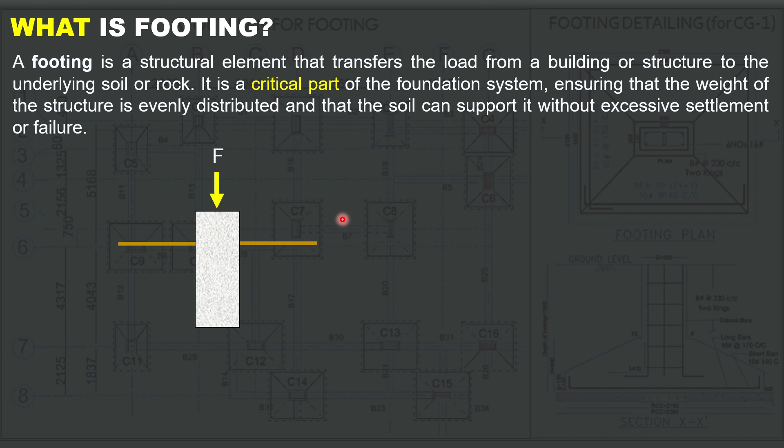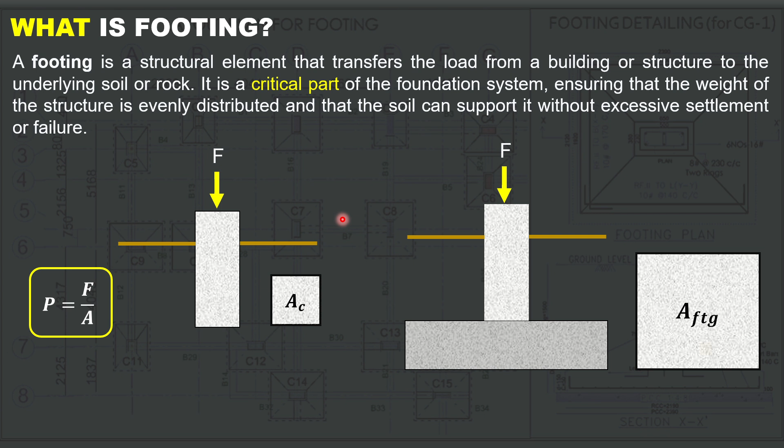Now, we have here two figures. One is without foundation and the other one is with the foundation. Now, notice parehas silang merong load na F, for example. Dito sa figure left, meron tayo ditong area na yung area lang din ng column mismo. Tawagin natin siya as AC. Then the other one is meron siyang AFTG or area of the footing. Now, take note of the formula. Recall natin that pressure is simply equal to the force over area.

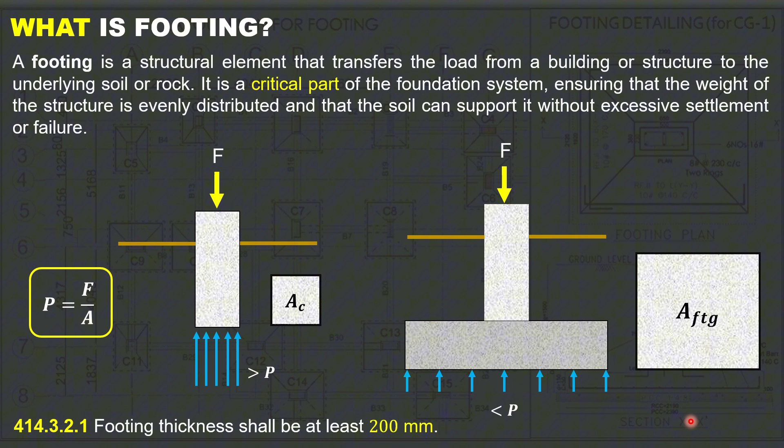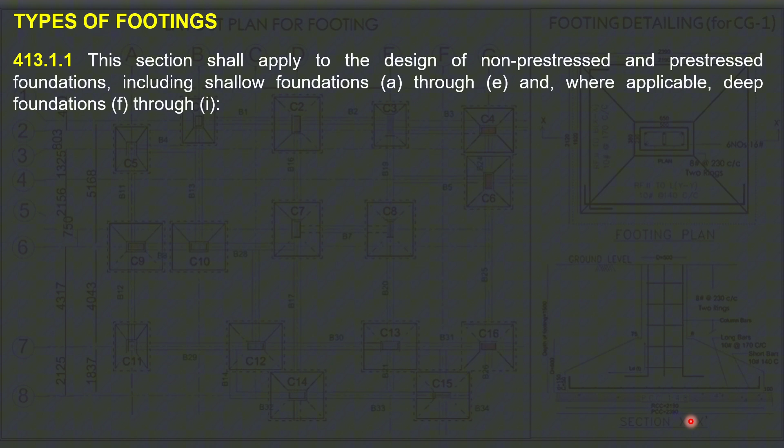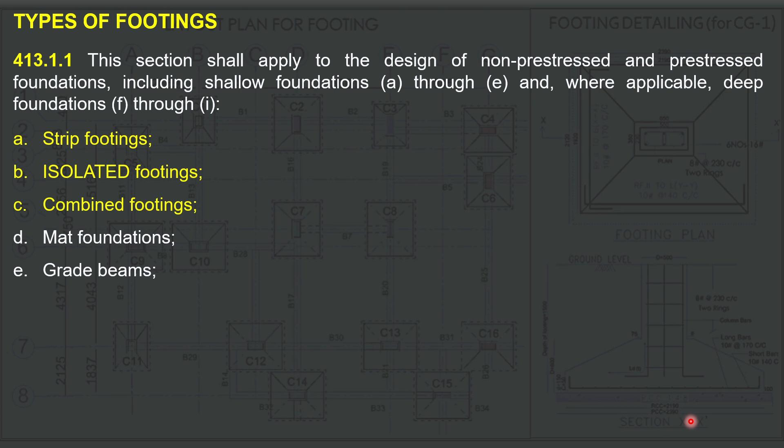Now we have here types of footings. Alright, so according sa NSCP rin natin 413.1.1, the section shall apply to the design of non-prestressed and prestressed foundations, including shallow foundations, which is from A to E, and where applicable, deep foundations from F to I. So yung A to E, it is classified as a shallow foundation, and then yung F to I naman natin is classified as deep foundations.

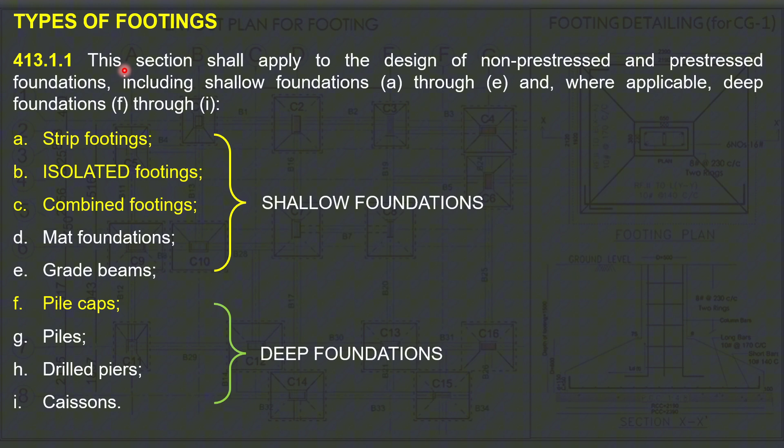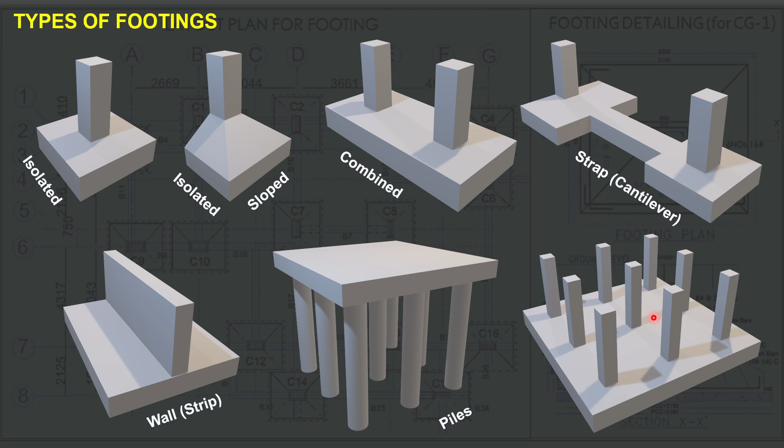We have here the strip or the wall footing. We also have here piles and the mat footing as well. Okay? Alright, so design considerations dapat natin na gawin dito sa Pilipinas, no? So lagay natin dito Philippine standard.

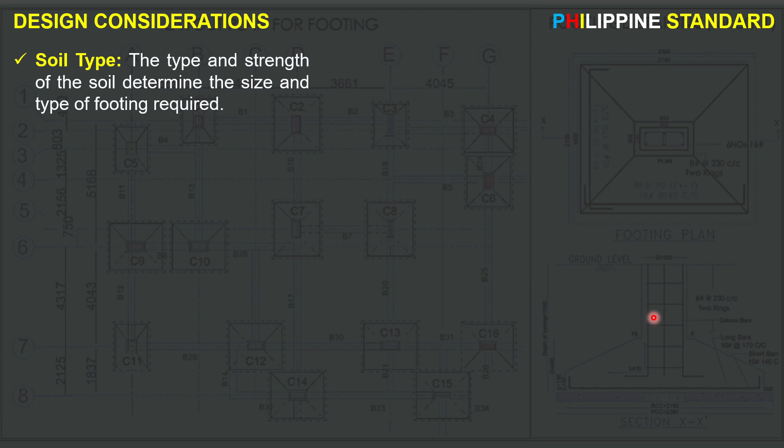So number one consideration when designing foundation, the soil type. The type and strength of the soil determine the size and the type of the footing required. Okay? So kung ano daw yung klase ng lupa natin, magbe-base doon yung magiging size and kung anong klase ng pundasyon yung dapat nating gamitin.

So we have here a snippet from NSCP 2015. Okay, first printing by the way, no? Hindi ko alam kung ito pa rin yung ginamit doon sa ating second printing which was released November 2019. Okay, hindi natin alam, no? O di ko sure kung same section ba sila.

Pero according to NSCP, for structures 2-story or higher, an exhaustive geotechnical study shall be performed to evaluate the in situ parameters for foundation design and analysis.

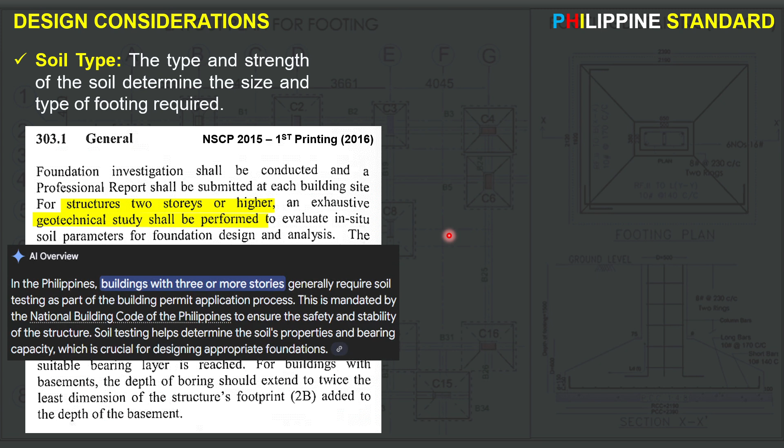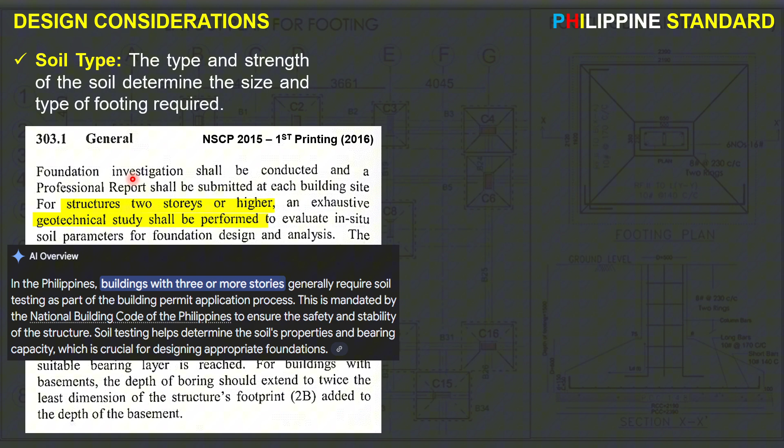Okay, but according to Google, and this is talagang nangyayari dito sa Pilipinas, in the Philippines, buildings with 3 stories or more generally require soil testing. Okay, so sa mga munisipyo natin or sa city engineering offices natin, 3-story talaga yung nire-require ng soil testing and not 2-story. So hindi ko sure if updated na yung ating NSCP 2019. Okay, so please do check na lang po.

And we also have here sa table natin 303-1 the minimum required number of boreholes per structure. If ever na magkaroon nga ng soil testing yung ating building, ito yung required na bilang ng testing or hukay na gagamitin natin sa ating building.

Okay, so for building footprint with area less than or equal to 50 square meters, kailangan lang natin ng 1 borehole. Then for areas 50 square meters to less than or equal to 500 square meters, we have 2 boreholes. And then for areas greater than 500 square meters, the number of required boreholes shall be equal to 2 plus the area divided by 1,000, and always round up to the nearest integer.

Okay, so ang ibig sabihin nitong mga area na to is footprint area of the structure, meaning yung building, not the lot area. Okay, so yung building area yung pinag-uusapan natin dito. Now sabi dito kung 50 square meter or less, required na 1. Sa NSCP natin, 1 talaga yan, no? Pero I'm not sure if most ng mga nagko-conduct ng geotechnical testing, 2 na yung minimum nila. I'm not really sure pero I think 2 yung minimum ng mga geotechnical engineers natin out there.

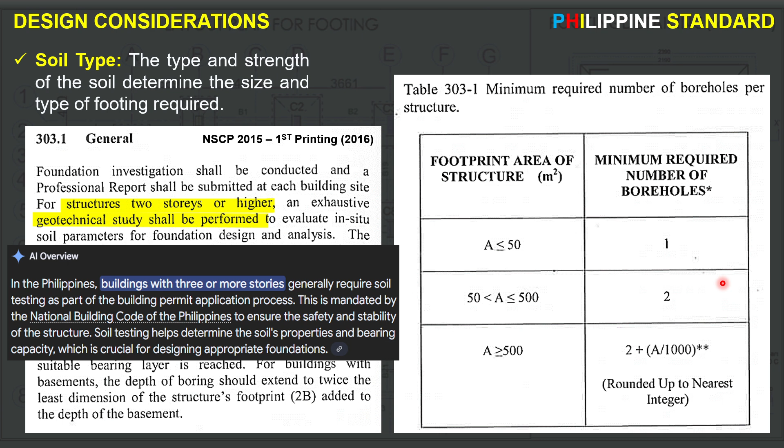So ito yung formulas natin, nasa table 303-1. Alright, and then also we have here a snippet from section 208.4.3, Site Geology and Soil Characteristics. So sabi naman dito, for example, 2-story lang yung building natin na hindi naman required ng soil testing, pero kailangan nating mag-conduct ng structural analysis pa rin. Now, according sa NSCP natin, tinulungan na tayo actually, we have here 208-2, the soil profile type. So, you notice this one sa ating STAAD, no? Ginagamit po natin ito sa STAAD natin if you are familiar with this one.

Meron tayo dito ng soil profile type SA which is classified as hard rock, SB as rock, SC as very dense, SD as stiff soil, SE soft soil, and then SF requires site-specific evaluation, or sobrang hina na ng SF dito. Okay, so according sa code natin, when the soil properties are not known in sufficient detail to determine the soil profile type, type SD shall be used.

If you are familiar sa STAAD natin, kung wala ngang soil testing na ginamit dahil 2-story lang naman yung building natin, okay lang naman daw according sa building offices natin, always assume yung ating lupa to be SD. Okay?

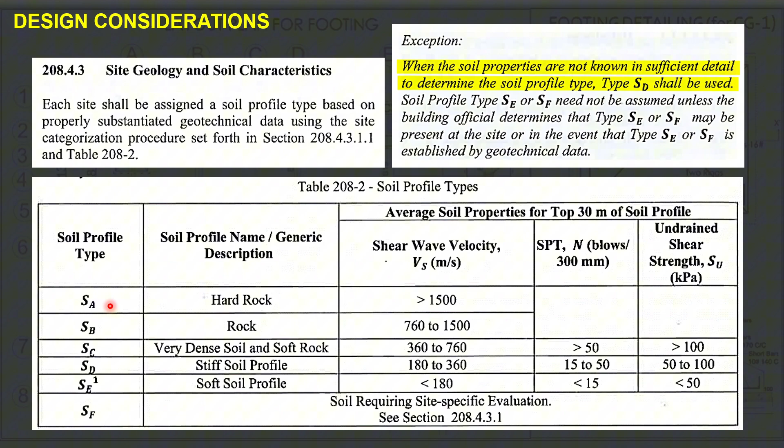Okay, next consideration natin dito sa ating design of foundation is the load. So the weight of the structure including the dead loads and the live loads, yun yung kailangan natin sa pagde-design ng ating foundation. Now, meron tayong dalawang klase ng load. We have the service loads and we have the ultimate loads.

Now, we only use the service loads. Ito yung combination na dead plus live lang, walang factor. Ibig sabihin nun, gagamitin naman natin yung mga service load to determine the size of the foundation. And kapag ka-factored naman yung mga loads natin, that is to determine the number of rebars naman po, yung mga reinforcement na kakailanganin natin dun sa ating foundation.

Okay, sabi dito sa ating NSCP 305.2.1, the design loads. Footing shall be designed for most unfavorable load effects due to combinations of loads. Okay, so meron sinabi dito, footing shall be designed. Kapag sinabi nating designed dito, hindi to yung itsura or shape ng ating pundasyon. When we say designed, this is the rebars or the reinforcement. Okay, so it pertains to the number of rebars, ilang bakal yung gagamitin natin, and not the shape and size ng ating foundation.

Combination of loads, ibig sabihin nito, ito yung mga factors, then makukuha natin yung designed or number of rebars required. Yun yung ibig sabihin po nito.

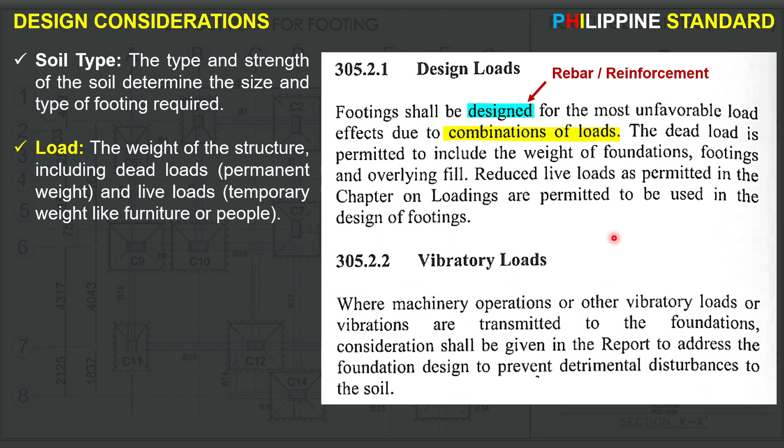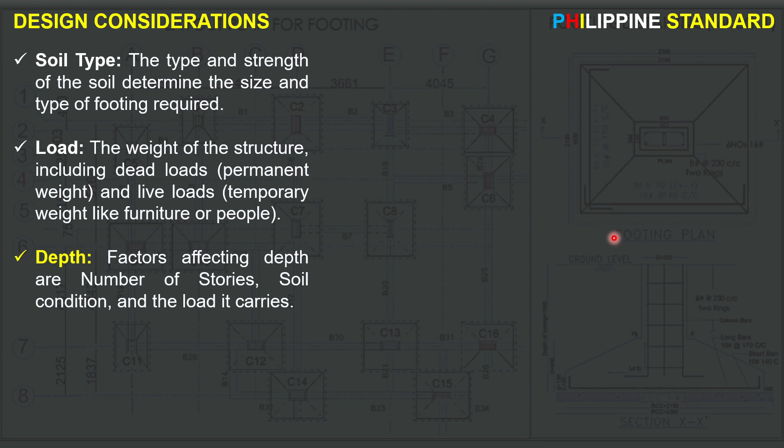Next consideration natin is the depth. So factors affecting depth are the number of stories, the soil condition, and the load it carries. Yung depth natin is proportional daw sa number of stories. Kung mas madaming palapag, mas madaming floors, ibig sabihin dapat mas malalim. Soil condition din, kung mahina yung lupa, dapat mas malalim. Kailangan nating ma-reach yung pinakamatigas na part ng lupa natin, and the load it carries as well.

So when we say undisturbed, again, walang vibratory loads na nangyayari malapit or dun sa mismong lupa na yon. Wala pang pinatayong building doon, so hindi pa siya nagalaw. So undisturbed pa yung lupa doon, yun yung ibig sabihin nito.

Okay, however, you don't want to do this, diba? Kahit pa sinabi ng code natin na okay lang naman gumamit ng 300 mm, parang nakakabahala gumamit ng 300 mm ngayon.

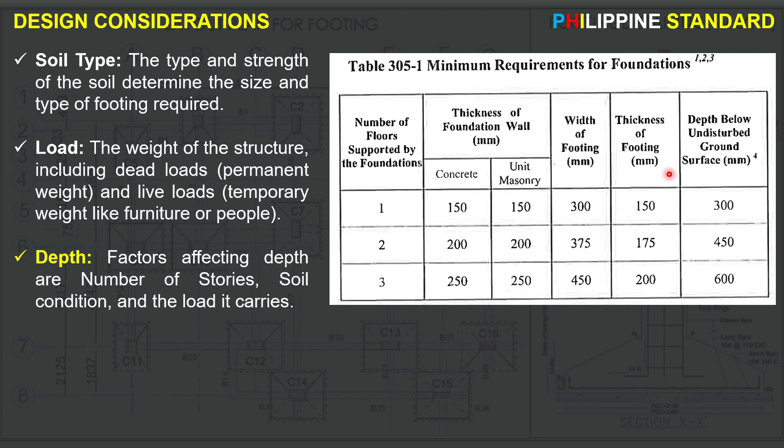And we also have here the Pie Homes' theorem, my theorem, no? Walang gumagamit dito. So this is my theorem about the footing depth. Footing depth can be derived directly. May mahaba tayong formula sa NSCP natin pero hassle gawin yun. Tedious gawin, madaming mga variables na kailangan i-consider, madaming factors na kailangan i-consider. And I have derived a theorem for the footing depth dito.

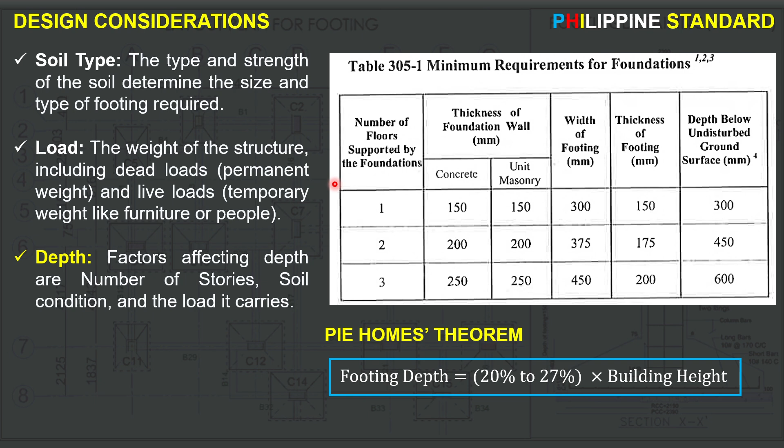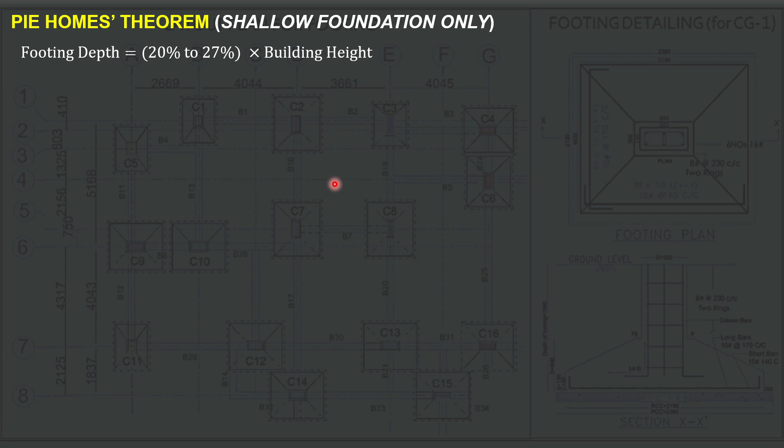So we can say that the footing depth can be 20% to 27% of the building height. Now, ano ba yung 20% dito and 27%? Saan siya galing? So we have here a derivation for this one. This is the theorem, Pie Homes' theorem. So this is only applicable for shallow foundation. Yung na-discuss na natin kanina, yung shallow foundation, and we also have deep foundation. So for deep foundation, this is not applicable, yung 20 to 27% na magic number natin. So again, footing depth is 20% to 27% of the building height.

Now, say for example, we have here a bungalow or 1 story and sabihin na lang natin na yung kanyang building height is 3 meters. Now, I assume here the per floor is approximately 3 meters. Ito yung ginamit ko na example dito. Now, 3 meters is only measured from the natural grade line hanggang dun sa roof beam level. So, it does not include yung roof height natin. Hanggang roof level lang siya kumbaga. Roof beam level lang siya included. Now, 3 meters ito kunyari.

At then again, sabi natin sa 1 floor, ang i-adapt natin na minimum depth is yung 600 mm, yung galing kay 3 story. So yun yung i-adapt natin dito. Now, the depth percent of this one is simply equal to, okay, ito yung depth percent natin, yung 20 to 27%. Transpose lang natin yung building height dito sa left equation natin. Now, depth percent is now equal to footing depth divided by building height. Now, the footing depth here, ginamit natin dito ay 600 mm, so that's 0.6 meters. Then, divide this by the building height, which is the 3 meters yung ginamit natin. And we will get 20%. So yun dun galing yung 20% natin dito as the magic number natin.

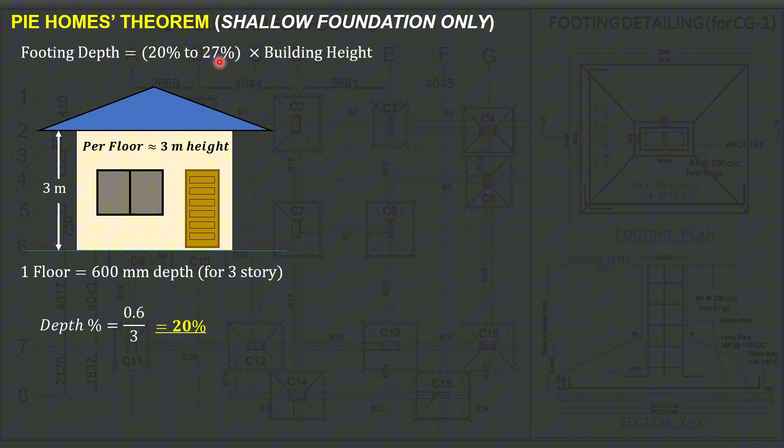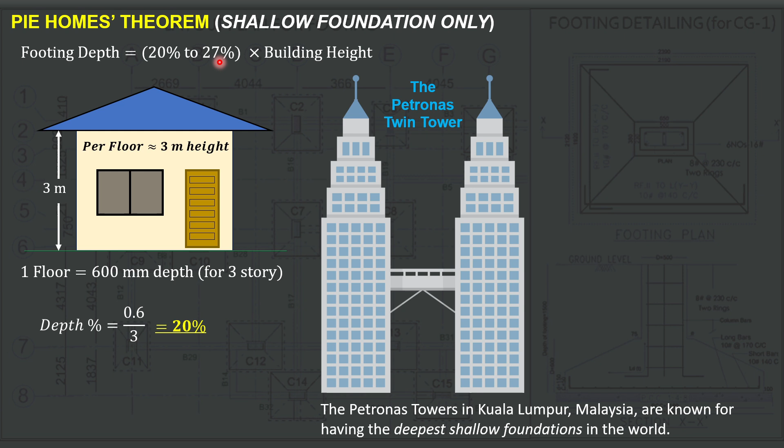And what about yung 27% natin dito? Okay, so again, we're talking about shallow foundation. Gamitin natin, since this is the maximum range, pwede natin gamitin din yung maximum or tallest building na gumamit ng shallow foundation, which is the Petronas Twin Tower. So you can search this one sa internet. So the Petronas Twin Tower in Kuala Lumpur, Malaysia are known for having the deepest shallow foundation in the world. So sila yung pinakamalalim na pundasyon pero considered pa rin as a shallow foundation and not a deep foundation. So eto, siya yung gagamitin natin as our reference para dito sa 27%.

Now, ang building height ng Petronas ay 452 meters high. And yung lalim naman ng pundasyon nito is nasa 120 meters deep. Now, applying this same formula, depth percent is now equal to the footing depth, which is equal to 120. Divide this by 452 and we get 26.55%. Now, this is approximately 27%. Dito galing yung ating magic number: 20% to 27% of the building height.

So you can use this as a preliminary. Don't adopt this completely. Conduct further investigation if this isn't enough. This can happen.

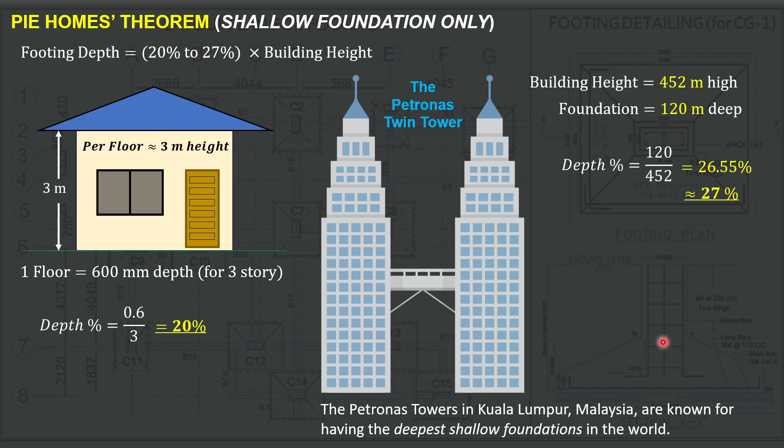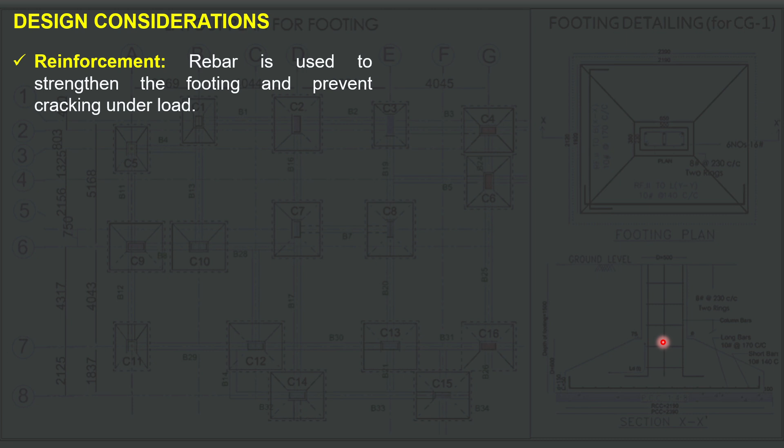And then the last consideration for our foundation is the reinforcement, of course. Rebar is used to strengthen the footing and prevent cracking under load. So reinforcement means a backup, so that our concrete structure becomes stronger.

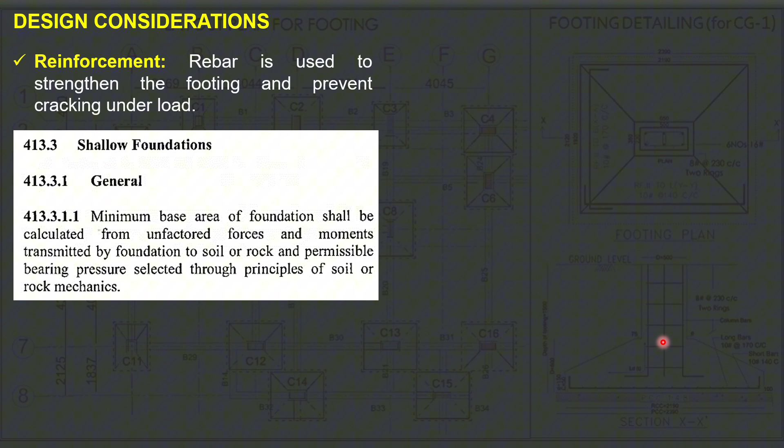So we have here section 413.3 for shallow foundations. It's stated here that the minimum base area of the foundation shall be calculated from the unfactored forces and moments, which I mentioned earlier are called the service loads. And then for the design criteria, the foundation shall be proportioned to resist factored loads and induced reactions.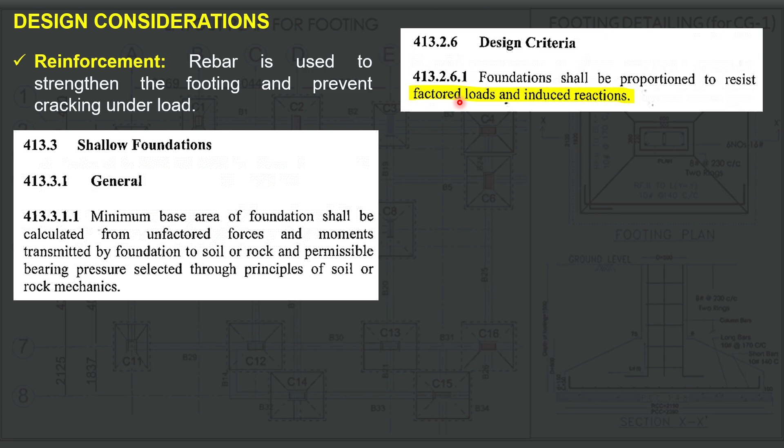This means factored loads and induced reactions are where the amount of steel reinforcement comes in. Our rebar must be able to resist the factored loads and whatever forces are applied to our foundation. And then we also have here table 413.2.7.1, location of the critical Mu.

Now in designing the number of rebars for RC or for the foundation, we always need the ultimate moment to know the number of rebars and to know the values of our Mu. Take note that you should know first where our Mu is located. I discussed this in one of our videos on spread footing, so you can check that video.

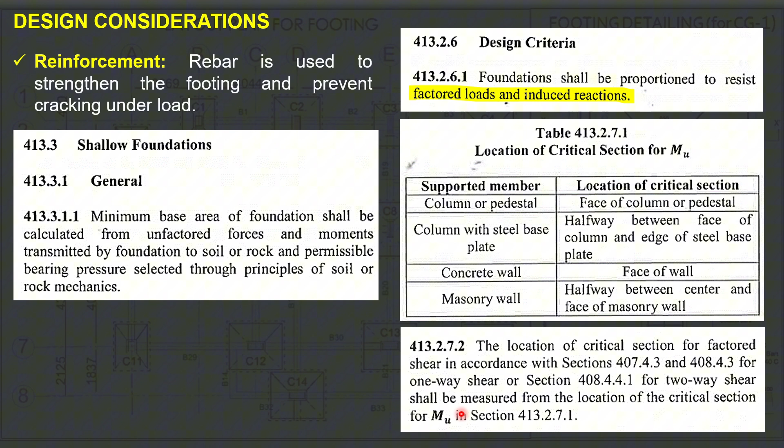So we have here: column or pedestal, face of the column with steel base plate halfway between the face of the column and edge of the steel base plate; concrete wall at the face of the wall; and masonry halfway between the center and face of the masonry wall. And then the location of the critical section for factored shear in accordance with section 407.4.3 and 408.4.3 for one-way, or section 408.4.4.1 for two-way, shall be measured from the location of the critical section for the Mu. This just means, like in our previous videos, the one-way shear and two-way shear are also measured from the location of the Mu.

And then this is the minimum base area for the unfactored forces, which means the service loads. When it comes to steel reinforcement, it's the factored loads. So in summary, footing area or the area of our foundation is based on the unfactored loads or what we call the service loads, and for the reinforcement, it should be based on the factored or ultimate loads.